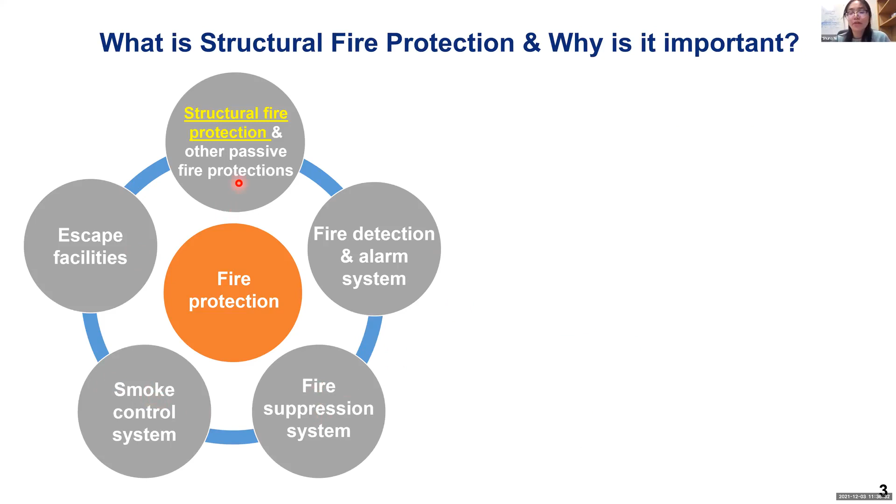So here, for the structure fire protection, it's one of the components of the fire protection of the building. For the fire protection building, it's including different components, for example, the fire detection and alarm system, the fire suppression system, and the smoke control system. The structural fire protection is one component of the fire protection building, and it's mainly to mitigate the risk of structural failure under fire exposures.

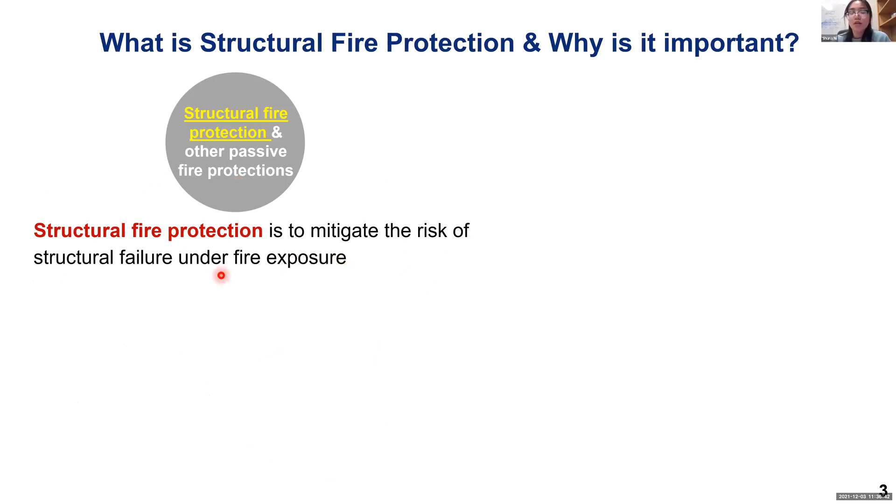So there are two specific objectives for the structural fire protection. The first one is to provide the structural integrity under fire to ensure the life safety of occupants and first responders. The second specific objective is to limit the structural fire damage, to mitigate the social economic losses. For example, if a vehicle fire happens under a bridge, we would like to make sure the structure of the bridge will not be damaged too severely. In this way, we can reduce the transportation disruption time and thus reduce the social economic losses.

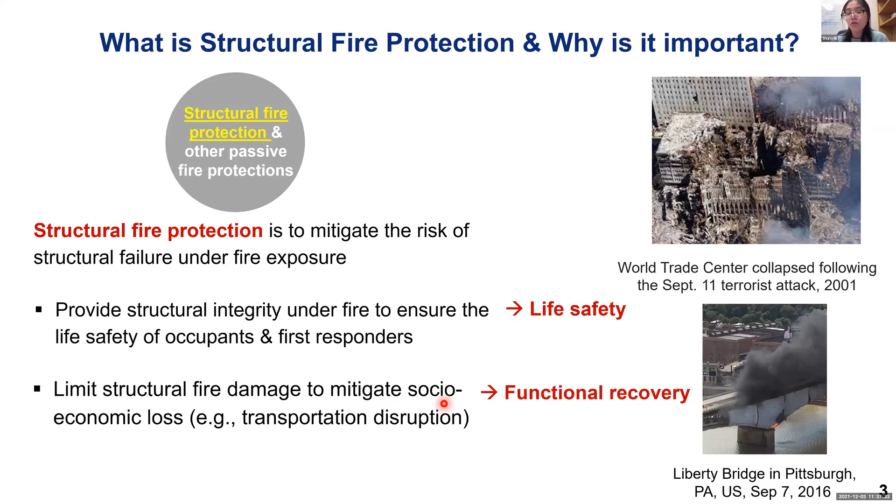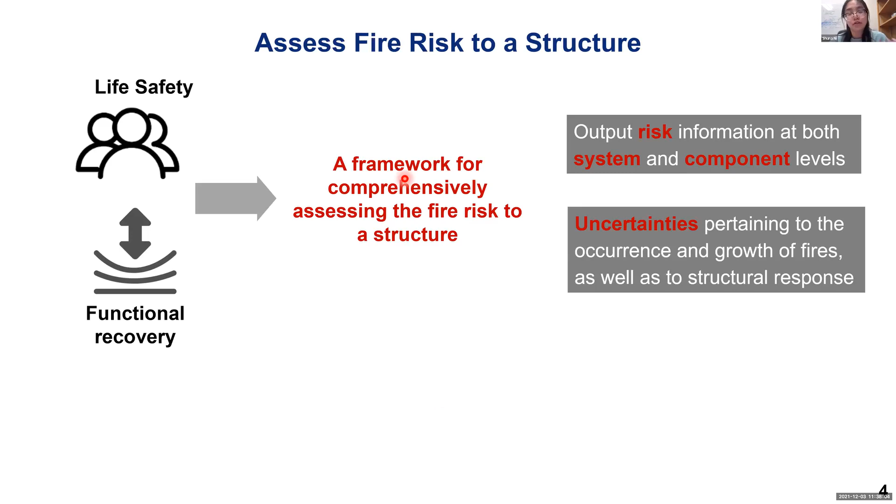So the first specific objective is mainly related to life safety, while the second one is mainly related to function recovery. So no matter life safety or function recovery, it all requires a framework which can comprehensively assess the fire risk to a structure. Here, by comprehensive, we mean that such a framework can output the risk information of a building at both the system level and the component level. We also hope such a type of framework can incorporate the uncertainties related to the occurrence and growth of fire, as well as the structural response. So such a type of framework basically will provide a methodology for the risk-informed performance-based design for the structural fire protection of buildings, and the output of such a framework will also facilitate the analysis of a structure's recovery after fires.

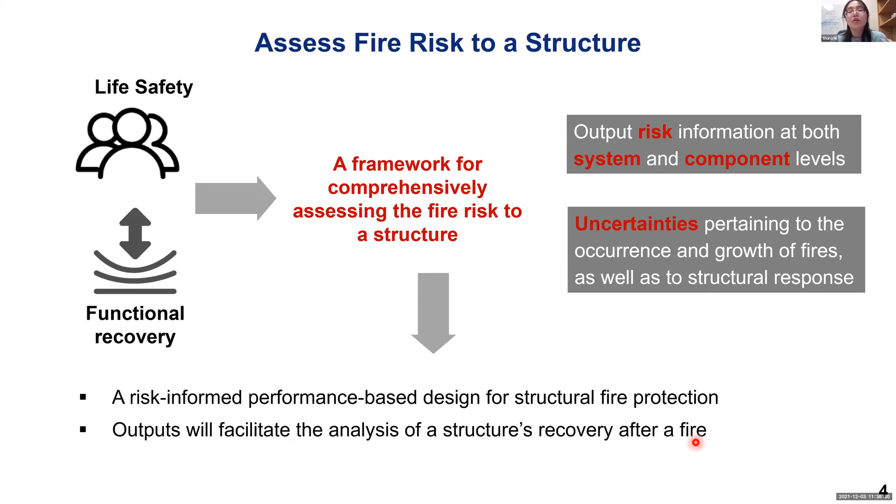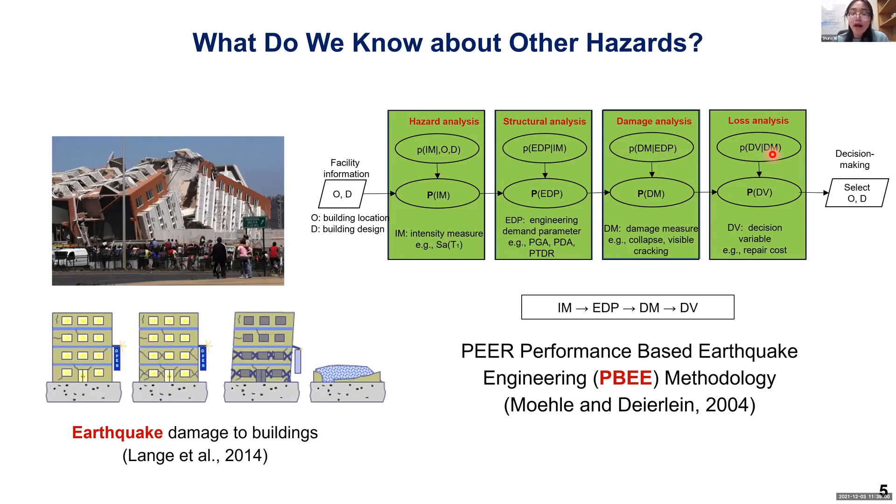So for other types of hazards, for example earthquake, they already have such a type of framework. For example, this is a framework developed by the Pacific Earthquake Engineering Research Center, and this framework basically follows four steps: hazard analysis, structure analysis, damage analysis, and loss analysis. There are some existing research efforts which try to adopt this framework for fire hazards, but there are some remaining challenges which need to be addressed.

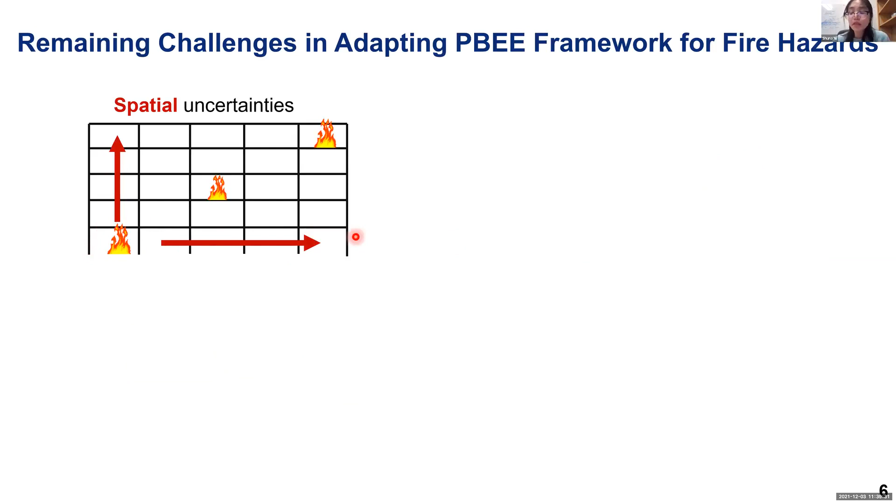So the first challenge is that this framework, those existing frameworks, didn't consider the spatial uncertainties of fire hazards. So when the fire happens, we don't know where the fire will begin, and also we don't know whether the fire will be confined in a compartment or will spread to other areas. Also, those existing frameworks basically use binary failure criteria. Basically, they classify the building as either failure or not failure, collapse or not collapse, which is not true, especially for some reinforced concrete structures.

Reinforced concrete structures usually have relatively good fire resistance. Under fire, these buildings will usually not collapse. But even in non-collapse scenarios, they still require a lot of repair efforts. So we need to propose a more meticulous classification of damage states corresponding to the gradual level of repair efforts for those non-collapse scenarios.

Existing frameworks mainly analyze the structure based on individual structure components—for example, analyzing one column, one beam, or a floor system. But in reality, each component within a building interacts with others. This interaction leads to additional deformation and additional damage. So our framework also needs to capture such interaction between each component within a building.

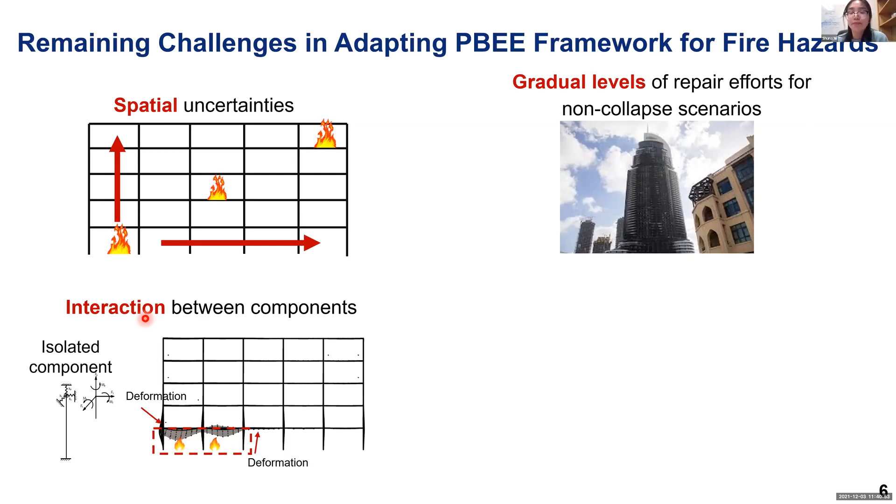The next one is multiphysics—fire damage is multi-physics in nature. Take the reinforced concrete structure for example: there will be damage due to thermal expansion, the expansion of a slab leading to lateral displacement of a column. There will also be section damage due to heat penetration, such as concrete spalling and cracks. We need to address both types of damage in our framework.

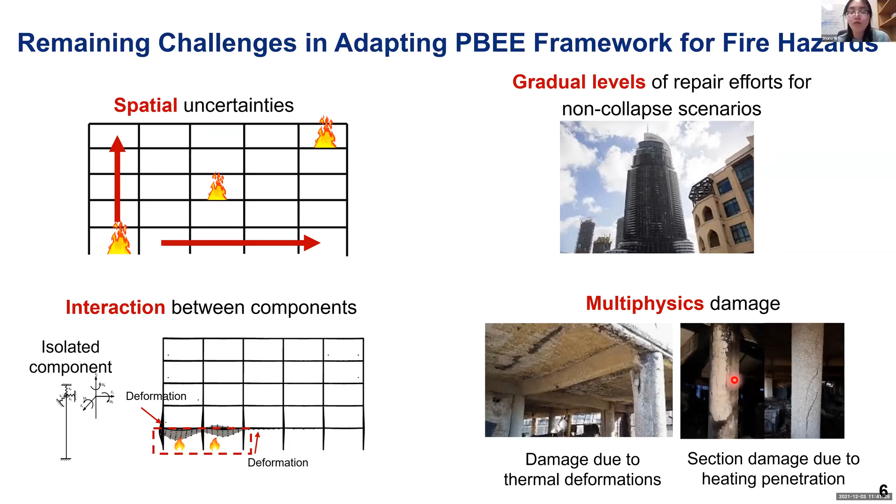This is the framework we have proposed. It's also based on the PBEE methodology, but we consider spatial uncertainty through a loop—basically considering different fire locations and different fire scenarios. For each fire location, our analysis follows four steps: fire hazard analysis, fire-thermo-mechanical analysis, damage analysis, and loss analysis.

In the fire hazard analysis, we identify the probability that a fire happens in one location, and we identify the intensity measure—here, the intensity measure used in our framework is fire load. In the fire-thermo-mechanical analysis, we output the structural response in a fire in a probabilistic manner, incorporating the interaction between each structure component within a building. That's why our framework analyzes a whole structure system rather than an individual structure component.

In the damage analysis, mainly based on the results from the fire-thermo-mechanical analysis, we analyze the probability of building collapse. If the building does not collapse, we calculate the probability of a structure component being at one specific damage state—basically calculating this quantity for each structure component and each damage state.

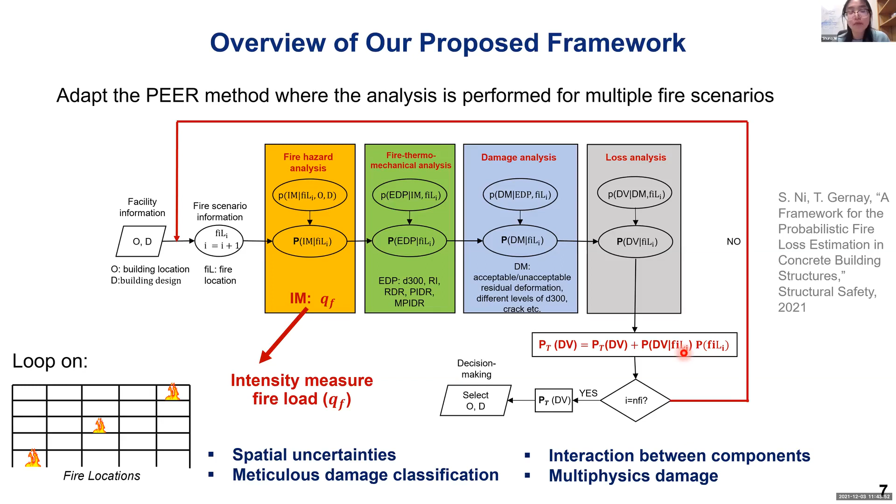So in this first step, the fire hazard analysis tries to identify the probability of fire happening in one location, and we mainly refer to the methods recommended by the Eurocode. Our contribution is mainly focused on the next three steps: fire-thermo-mechanical analysis, damage analysis, and loss analysis.

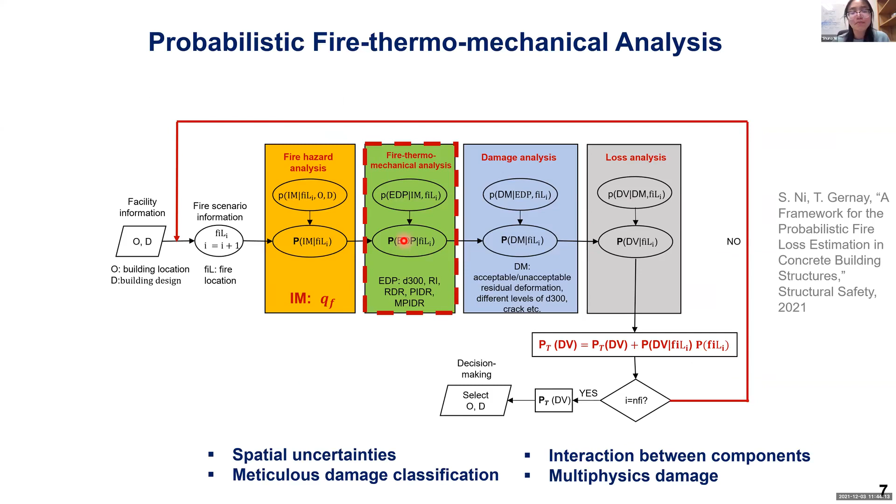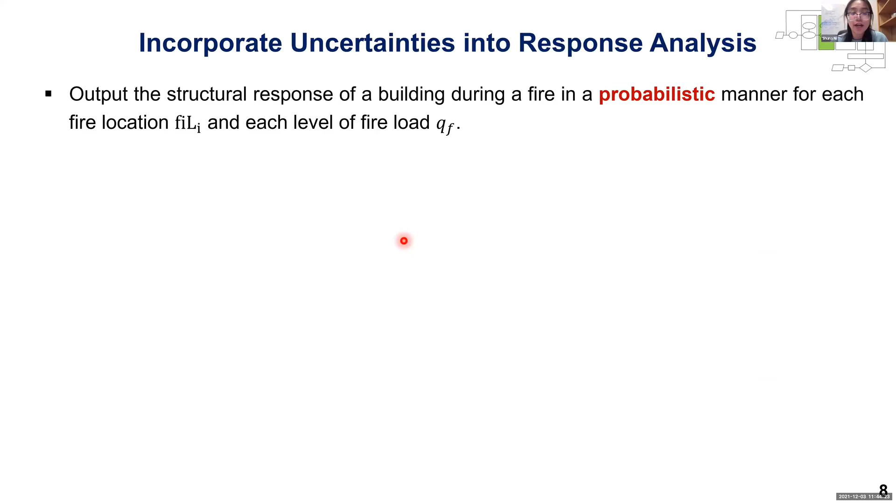Now I would like to give you more insight about the fire-thermo-mechanical analysis. In this step, we try to output the structural response of the building during a fire in a probabilistic manner for each fire location and each level of fire load. In our deterministic fire-thermo-mechanical analysis, the analysis has three steps: fire analysis, thermal analysis, and mechanical analysis.

In the fire analysis, we analyze how the fire develops in our building, and that information is input into the thermal model as the thermal boundary condition to analyze the temperature distribution in a structure component or building. That temperature data is input to the mechanical model as the thermal load to analyze the structure's response in the fire. This is the deterministic manner, but in reality, uncertainty exists everywhere.

The opening or compartment have uncertainties. Mechanical load has uncertainties. Material properties also have uncertainty. There are a lot of other variables with uncertainty. So in this step, we need to incorporate all these different types of uncertainty into the fire-thermo-mechanical analysis through Monte Carlo analysis or other methods. Ultimately, we would like to output the probabilistic distribution of the building response rather than individual values.

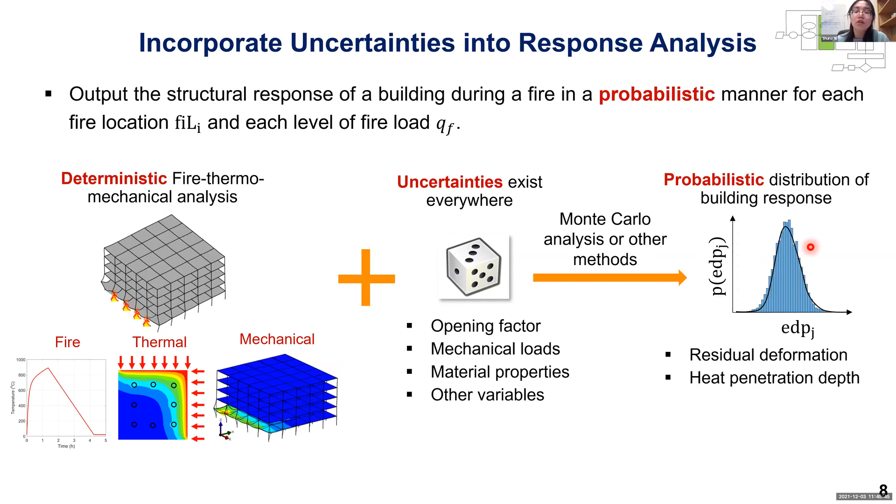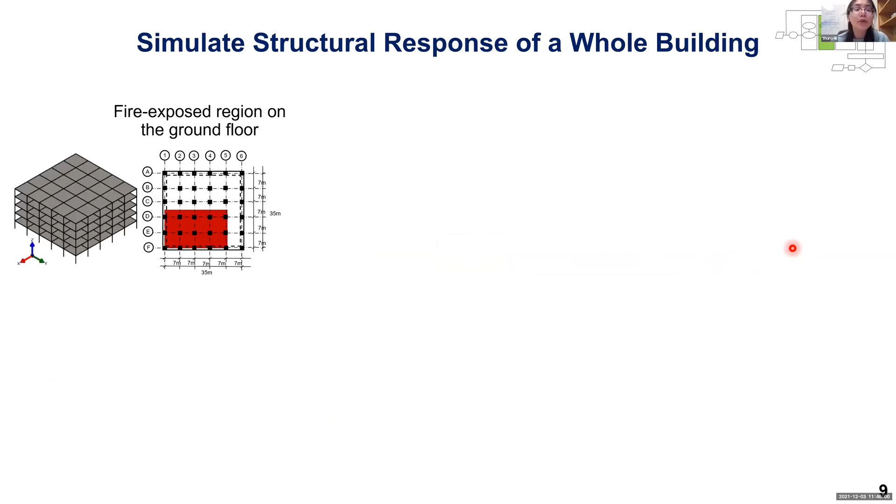As mentioned, our analysis is based on the building system. I would like to show you why we need to analyze the whole building system. This is a 5-story building, and we analyze the structural response. We developed the building model for the whole building, and we analyze the displacement of each structural component under the fire.

If you look at this column, due to the thermal expansion of this slab, this column has a very large lateral displacement. The maximum value is up to 116 millimeters. Even when the temperature cools down to ambient temperature, the remaining lateral displacement is still 79 millimeters. This type of deformation cannot be captured if you're using isolated structure component analysis. If you just analyze this column alone, this type of deformation is very difficult to capture.

However, there's a problem. Since our analysis is probabilistic in nature, if we analyze the whole building system and run the scenario 1,000 times, that will be very time consuming.

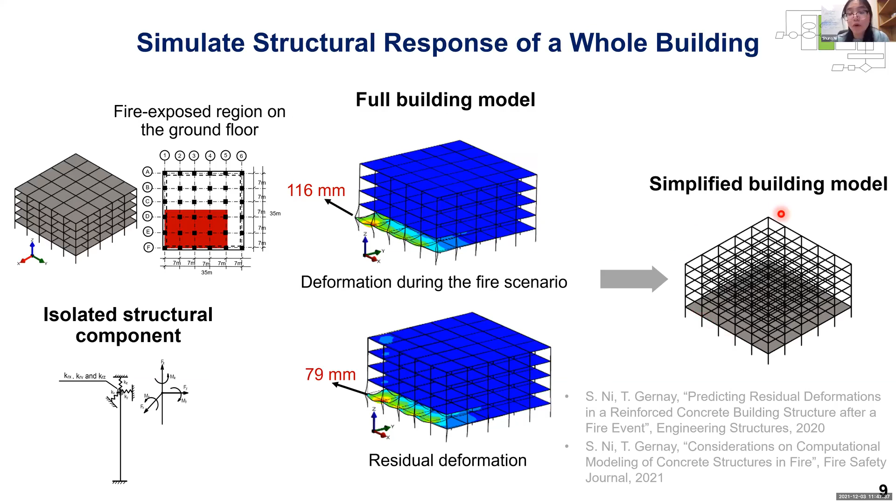It will require a lot of computation time. So what we've done is try to simplify the model. Our research has shown that if your fire is just at the first story, you don't need to model the other floor systems. You just need to model the floor system above the region where the fire begins. This is a simplified building model, and here's some comparison between results from the two models.

This is the result of the lateral displacement at the top of the first story column. We've analyzed the lateral displacement at this location, at the top of the first story column. The left side is the maximum displacement, and the right side is the residual displacement. We compared the results from the two models, and they are very close to each other, both in magnitude and direction.

Such a simplification has reduced the computation time by half, but it's not enough. So our next step is to develop some data-driven surrogate models to replace those physical models, but this is one of our future research directions. Basically, we would like to develop a data-driven surrogate model to analyze the structural response of a whole building system under fire.

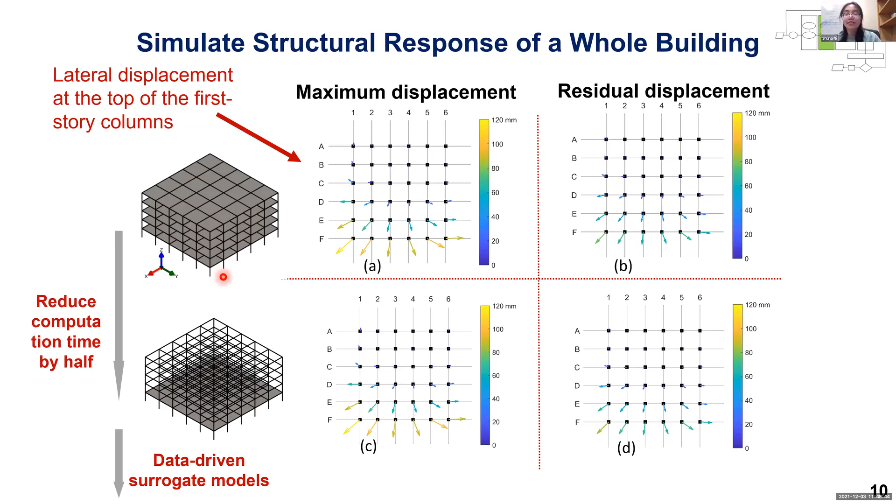As we've mentioned, we would like to consider the uncertainties. So how do we consider uncertainty? We need to have a lot of probabilistic models for different variables. Previous research has developed probabilistic models for openings and for mechanical loads. Our contribution is the development of the probabilistic temperature-dependent concrete model.

So we collected this concrete strength data from different literature and previous studies, and here are those concrete strengths. The model we developed is the retention factor. The retention factor is the ratio of the concrete strength at high temperature, at one specific temperature, over the concrete strength at ambient temperature.

We developed the probabilistic model for the concrete data at each temperature, and ultimately the parameters for the Weibull distribution were fit as a function of temperature. This is how we developed these probabilistic models. The probabilistic distribution we used is the Weibull distribution. We tried comparing results from different distributions and found the Weibull distribution works best.

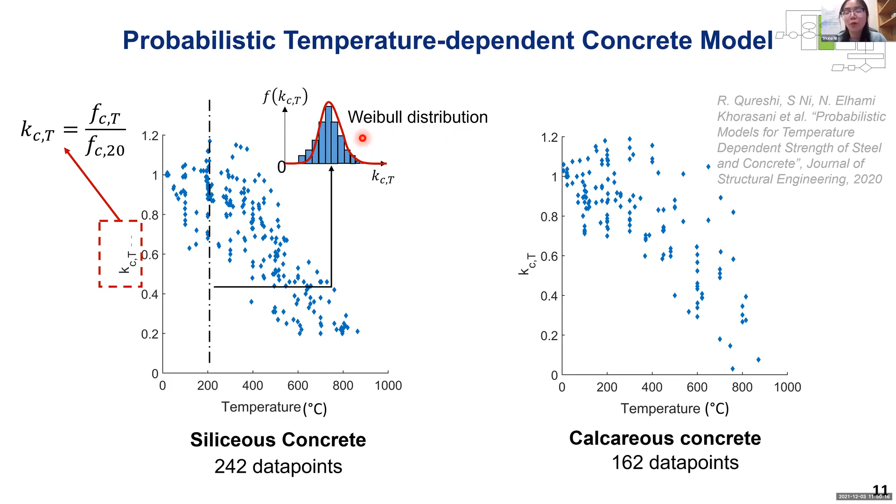This is a comparison of our probabilistic model with some deterministic models. The black solid line is the median value of our model, and it's very close to the deterministic model in red. We also found that most test data fall between the 5% quantile and the 95% quantile of our model. This is the temperature-dependent concrete model.

We also developed the model for steel, for the temperature-dependent yielding strength of the steel. Those probabilistic models have been incorporated into commercial nonlinear finite element software, which is mainly used for structural engineering.

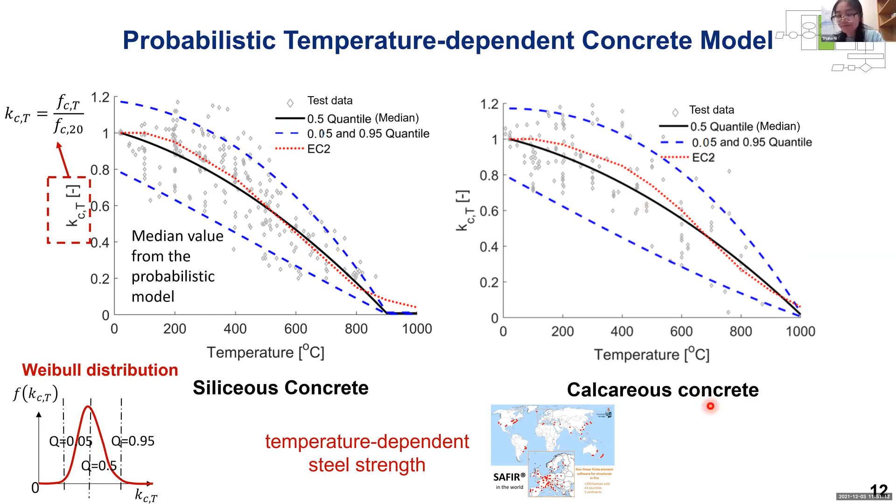So now I've been talking about the fire-thermo-mechanical analysis. Basically, this step can output the response of the structure in a probabilistic manner. Based on these results, we can do the damage analysis. Here I would like to show you what damage we consider in this framework.

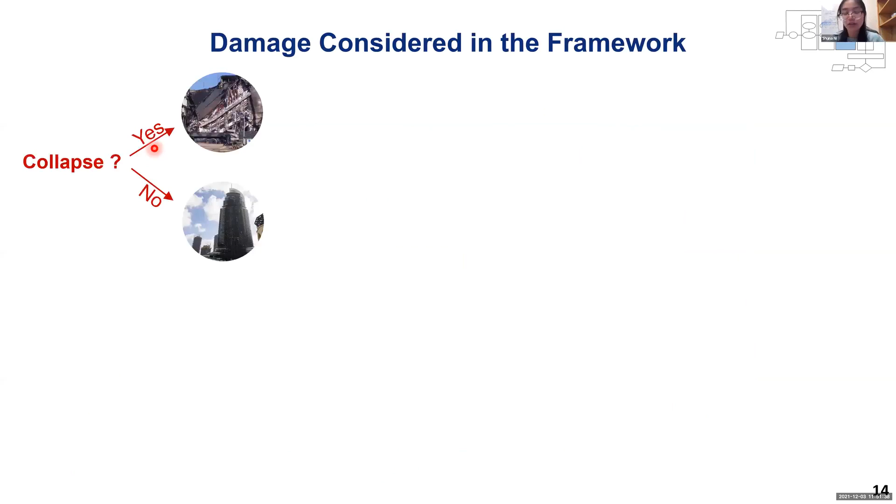We first need to identify whether the building will collapse or not. If the building does not collapse, we need to consider the damage in the fire rated and non-fire rated areas, and we need to consider damage to structural components, non-structural components, and content.

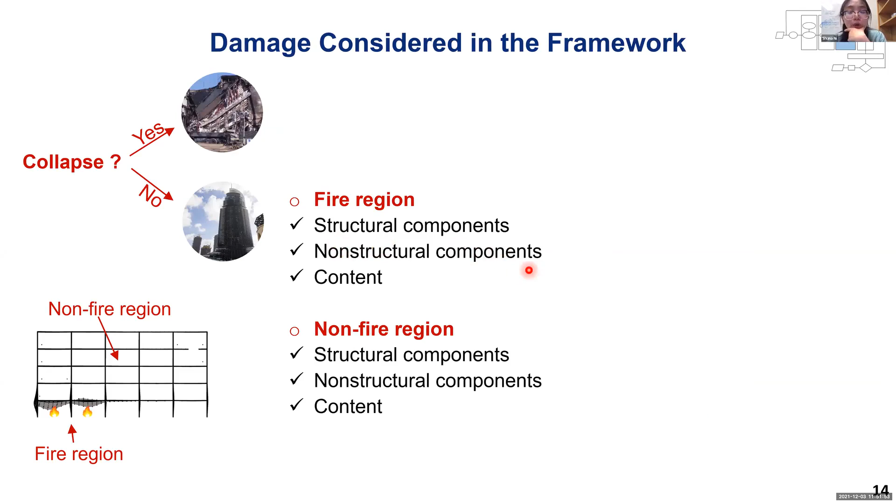So the output of this step is, first, the probability of building collapse under the fire load QF, conditioned on the occurrence of fire in location I. And if the building does not collapse, this step will tell you the probability of a component being at a specific damage state under the fire load QF, conditioned on the occurrence of fire in location I.

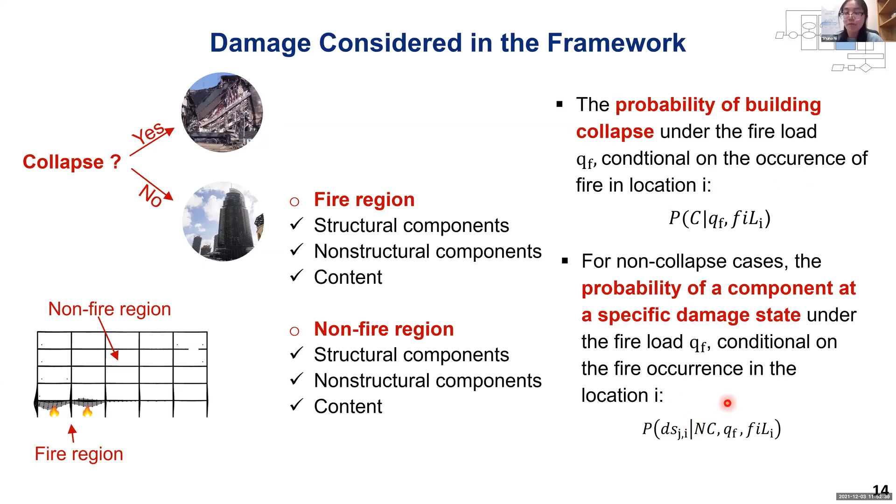It's very easy to calculate the probability of building collapse, but the calculation of the probability of a component at a specific damage state requires a lot of definition and further development of this framework. So next, I would like to show you how we calculate the probability of a structure component at one damage state.

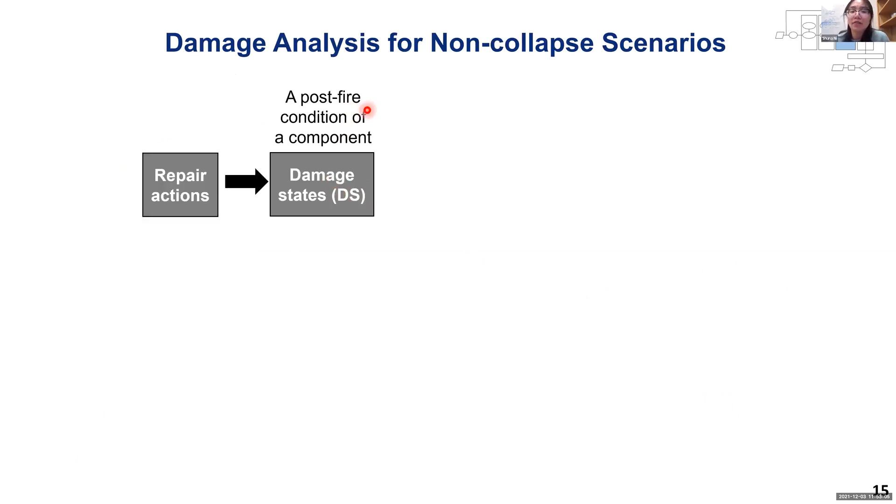First, we need to define the damage state of a structure component after the fire. The damage state means the post-fire condition of a component, mainly determined by the different level of repair actions. The engineering demand parameter, which is a response quantity for estimating damage, is used to estimate the damage. Where do we get the engineering demand parameter? It's the response quantity of the building.

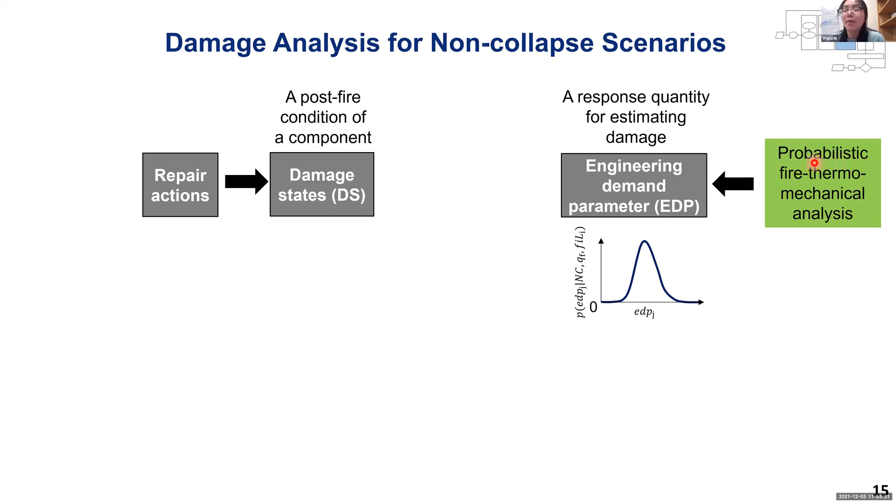Definitely, it comes from the second step, probabilistic fire-thermo-mechanical analysis. This step outputs the probabilistic distribution of those response quantities. These two, damage state and engineering demand parameter, are connected by the fragility function. The fragility function is the probability distribution of reaching or exceeding a damage state.

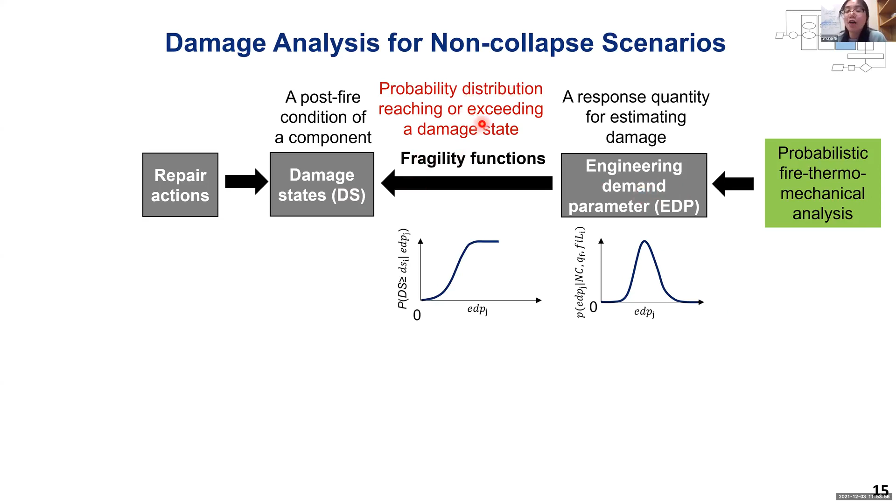Ultimately, the convolution of the fragility function with the probability distribution of the engineering demand parameter will tell you the probability of a structure component reaching or exceeding one damage state. But it's conditioned on fire load qf, and the fire happens at location FILI.

So this calculation process will be repeated for different fire loads. Ultimately, we get the fragility function as a function of fire load. So the damage state of a structure component is now at one specific damage state.

The damage probability distribution of a structure component at one specific damage state will be the difference between two successive damage states. Since the earlier calculation was just reaching or exceeding, this part of the calculation will ultimately tell you the probability of a structure component at one specific damage state. So this is how we calculate the probability of a structure component at one specific damage state.

From this, we may already know that we need to define the damage state. We also need to know the fragility function, and we also need to propose the engineering demand parameter. All those functions or parameters need to be hazard specific. For fire hazard, it has to be fire specific. But all of this is trying to address the damage state.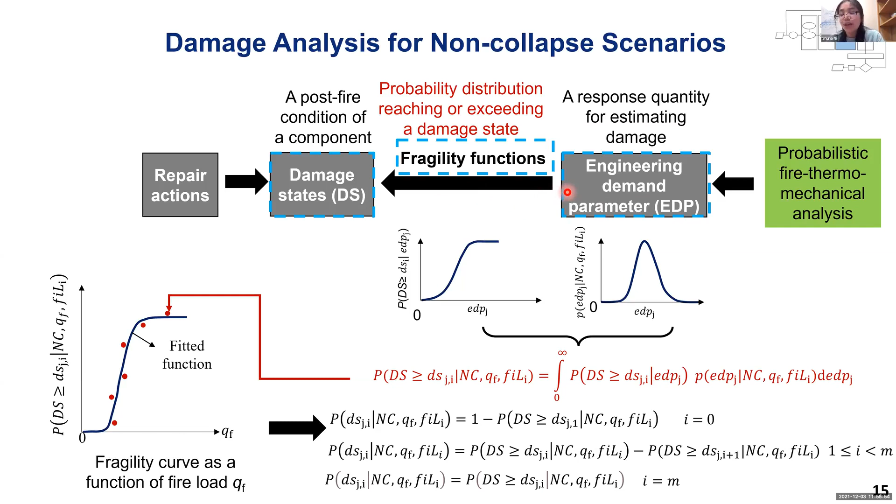The characteristic of fire hazard, as we mentioned, is multiple physics. It will have some section damage due to heat penetration, spalling, cracking, and also some damage related to thermal expansion, the residual deformation. Both types of fire damage need to be addressed by this framework.

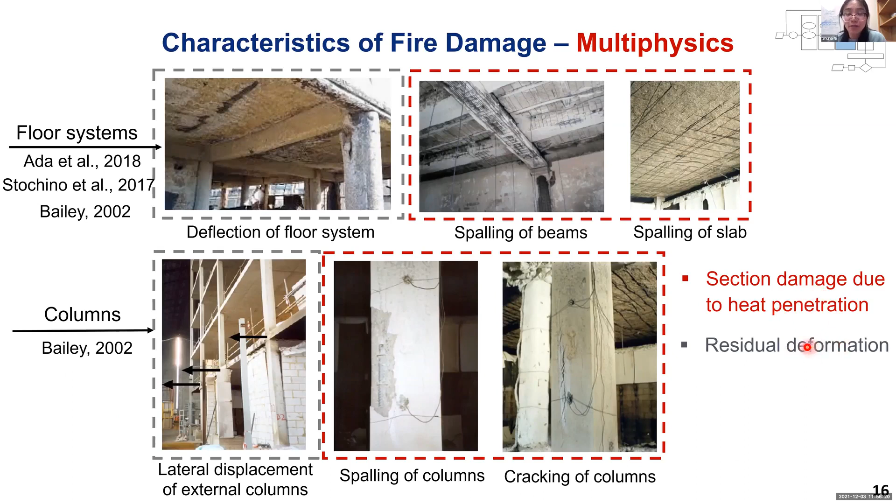Corresponding to the two types of damage, we have defined two sets of engineer demand parameters. One engineer demand parameter tries to address the section damage due to heat penetration, while the other set of engineer demand parameter tries to address the residual deformations.

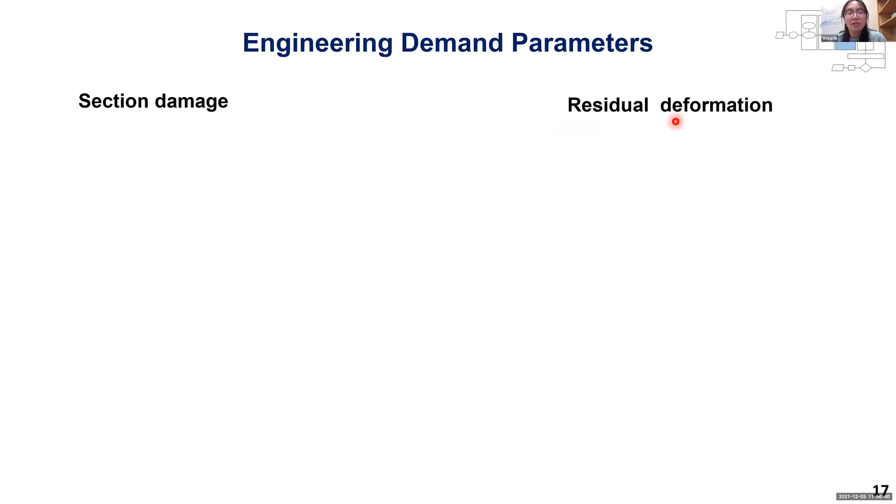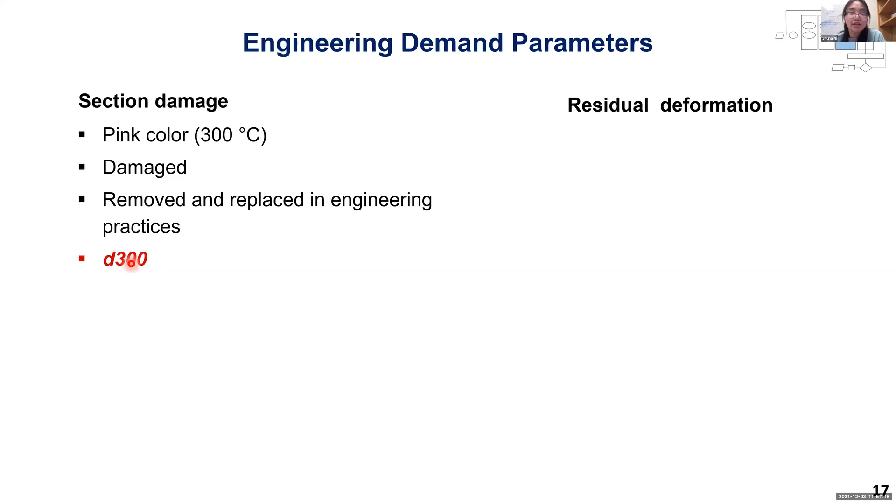For the section damage, usually with heat penetration in practice, when the temperature of the concrete exceeds 300 Celsius degrees, the color of the concrete will turn to pink, and in practice that concrete will be replaced. So the engineering demand parameter we defined to address the section damage due to heat penetration is D300. D300 is the heat penetration depth of the isotherm with peak history temperature equal to 300 Celsius degrees.

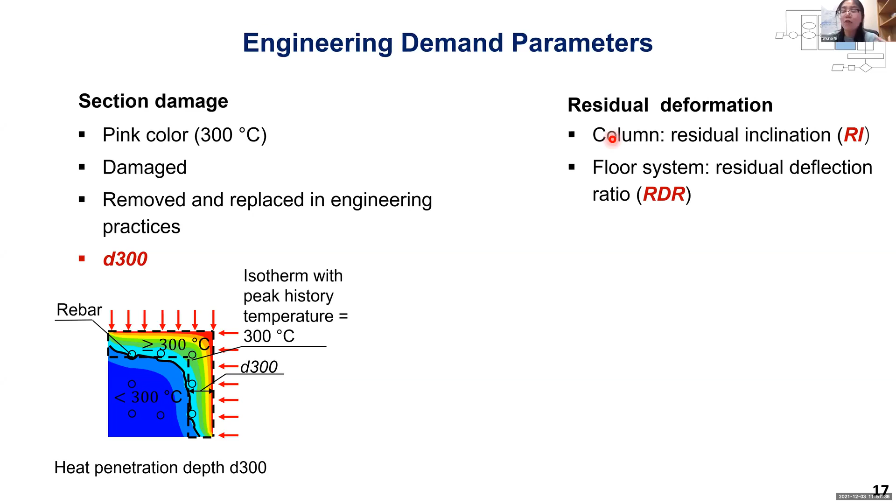For the residual deformation, we have proposed different engineer demand parameters for different structure components. For the column, what we have defined is residual inclination, which is the lateral displacement at the top of the column over the height of this column. For the floor system, what we have defined is the residual deflection ratio, which is the deflection of a floor system over the span of this floor system.

So this engineering parameter tries to address the section damage due to heat penetration, while this set of engineering demand parameter tries to address the residual deformation of a structure component after the fire hazard.

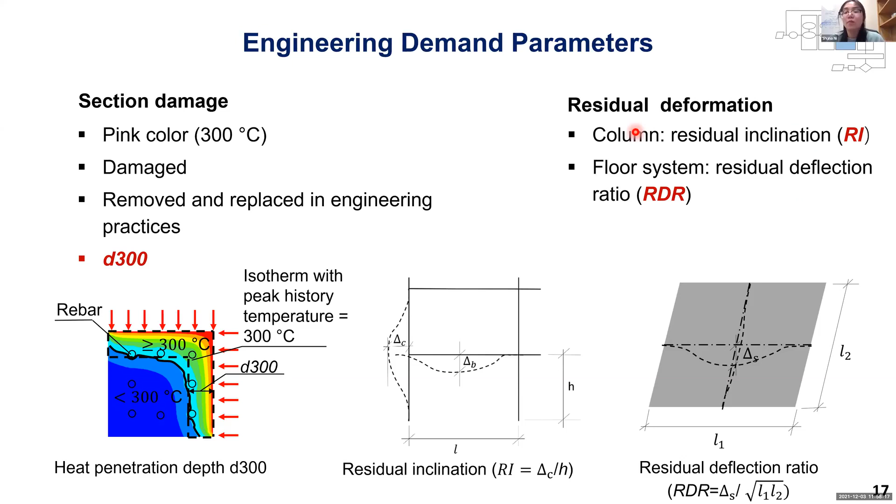Now I would like to show you how we define and propose the classification of damage states. Let's take the heat penetration damage, for example. Basically, in the development of the classification of damage states, we need to make sure each damage state corresponds to each level of repair efforts.

For heat penetration damage, in practice the level of repair efforts is mainly determined by the heat penetration depth of the isotherm, which is equal to the peak temperature equal to 300 Celsius degrees. This parameter is the engineering parameter we have defined to judge the section damage, meaning this d300 determines the repair efforts, while the repair efforts determine the damage states.

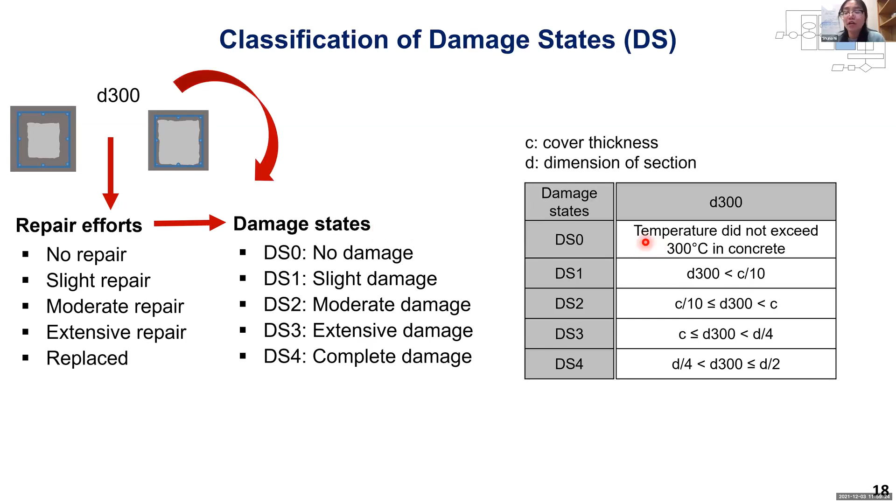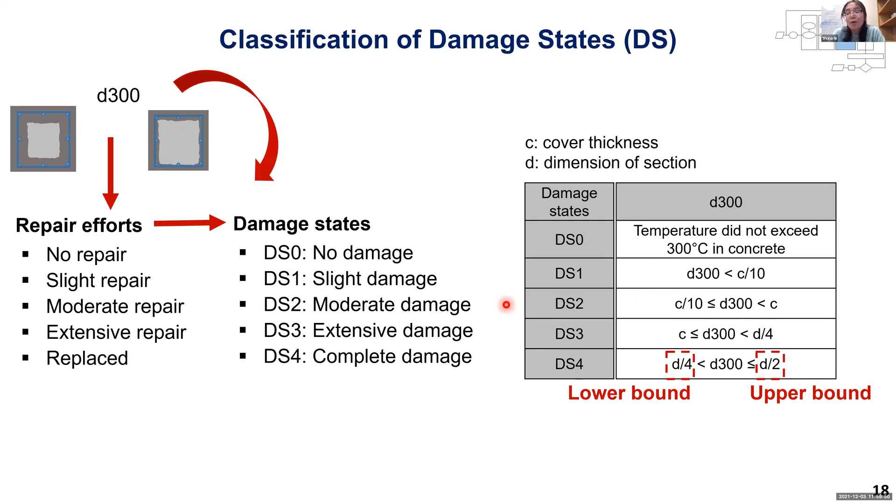That's why when we define each damage state, we can use a range of the engineering parameters. For each damage state, we propose a range of the engineering demand parameter with an upper bound and a lower bound. This is how we classify the damage states, mainly based on the engineering demand parameter, with a lower bound and upper bound for each state. Next step is the fragility function.

The fragility function for earthquake engineering is mainly developed based on test data. But the structural response under fire has relatively limited test data, so we use a different way to develop the fragility function.

As mentioned, our classification of damage states is mainly based on the engineering demand parameter directly, a range of which defines one damage state. So once we get the probability distribution of the engineering demand parameters, we can calculate the probability of a structural component being at one specific damage state directly. But in reality, uncertainties exist everywhere.

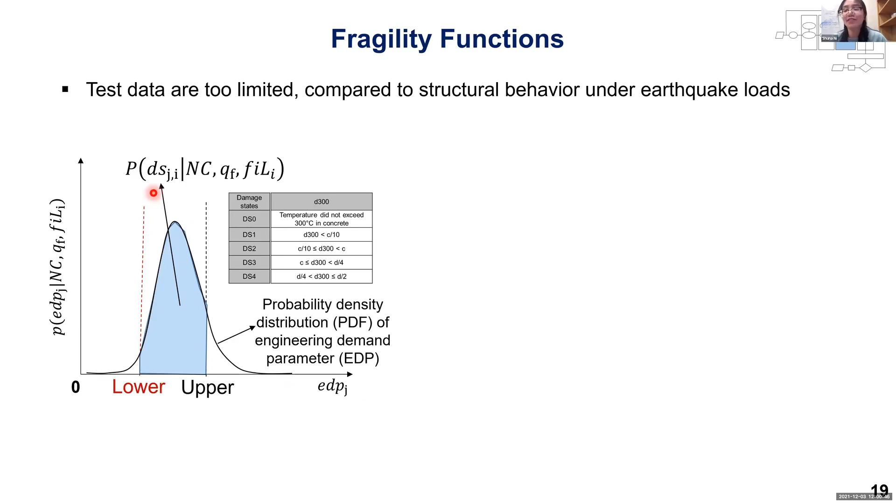So those lower bound or upper bound values also have some uncertainties. For example, different engineers may have different opinions about those threshold values. So we assume those threshold values follow a log normal distribution. Ultimately, the log normal distribution of the lower threshold value becomes a fragility function for one damage state.

Once we get the probability distribution of the engineering demand parameter, the convolution of the fragility function and that probability distribution ultimately tells us the probability of a structure component reaching or exceeding one damage state.

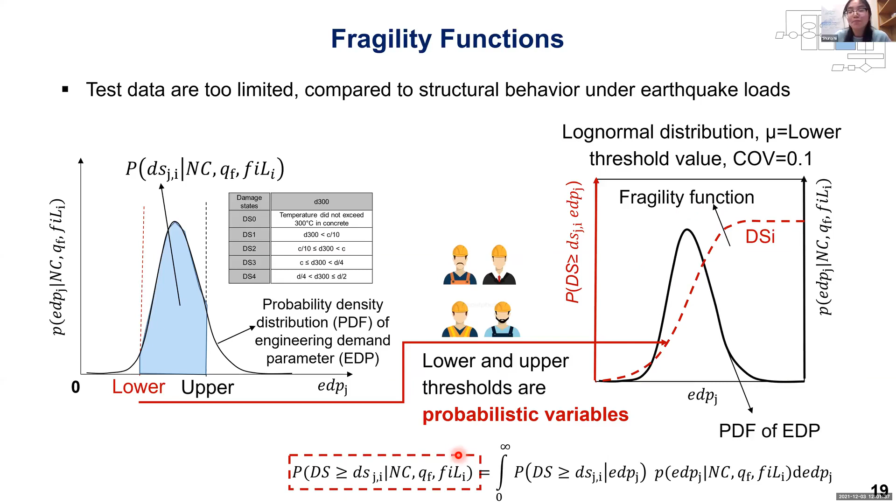So this is how we have defined the fire-specific engineering demand parameters, the fire-specific classification of damage states, and also proposed fire-specific fragility functions, and how we develop those fragility functions for fire-specific damages.

Based on those definitions of parameters and functions, we can conduct the damage analysis and get the probability of a building collapse. If the building does not collapse, we can calculate the probability of a structure component being at one specific damage state, and those probabilities allow us to do the loss analysis.

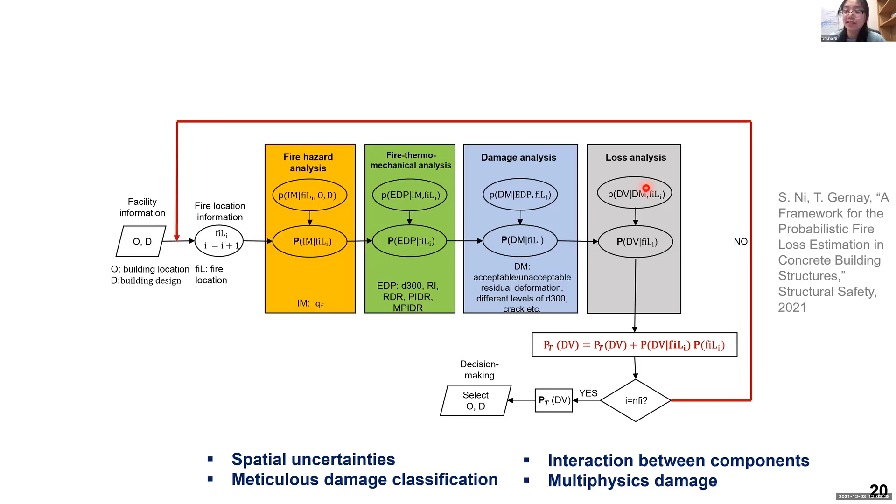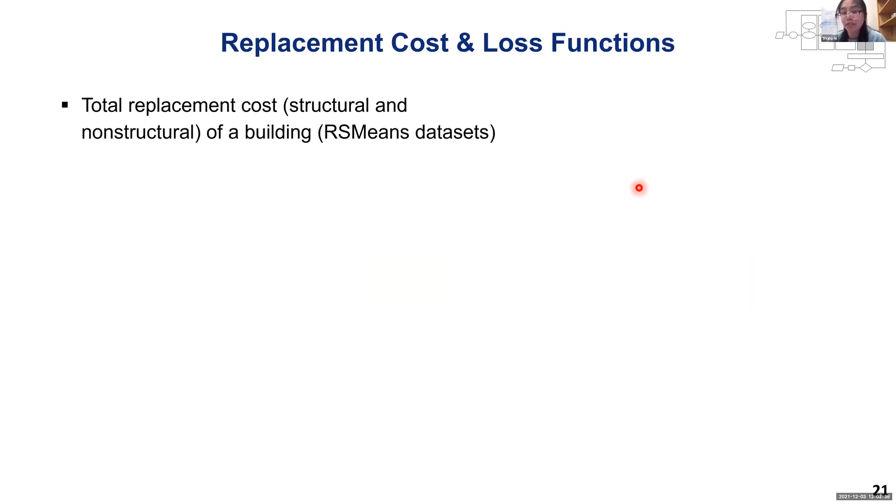In the loss analysis, first we need to identify the total replacement cost of a building. If the building collapses, the cost will be the total replacement cost, including the cost for the structure component and the non-structure component, and also the content in the building, along with the total replacement cost for structure and non-structure components.

Those costs can be estimated using construction manual data. For example, in the United States, the RSMeans dataset has been used very frequently by people in the industry. For the content replacement cost, FEMA's recommendation is that the replacement cost for the content in a building is equal to the total replacement cost of the structure and non-structure components of the building.

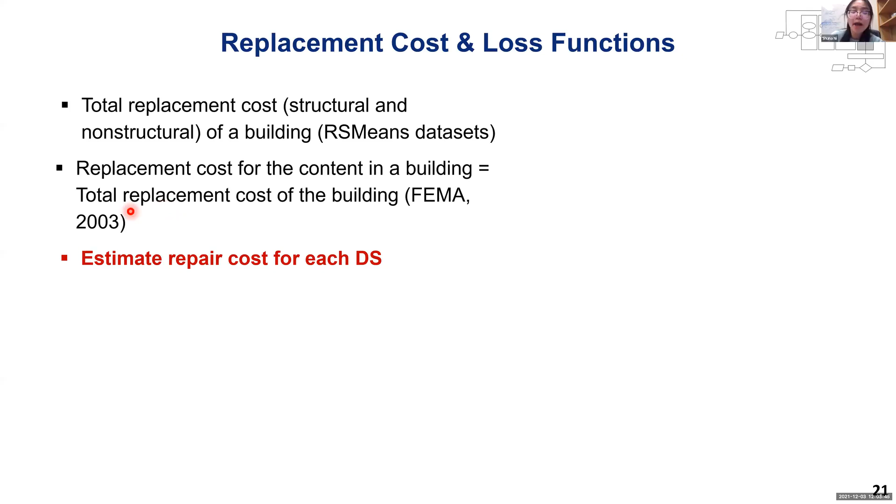If the building does not collapse, we need to identify the repair cost for each damage state for each structure component. The repair cost really depends on the repair action used. We have identified the different repair actions from the literature and by talking with people in the industrial field, for each damage state and each structure component, and based on this we can calculate the mean repair cost for each structure component at each damage state.

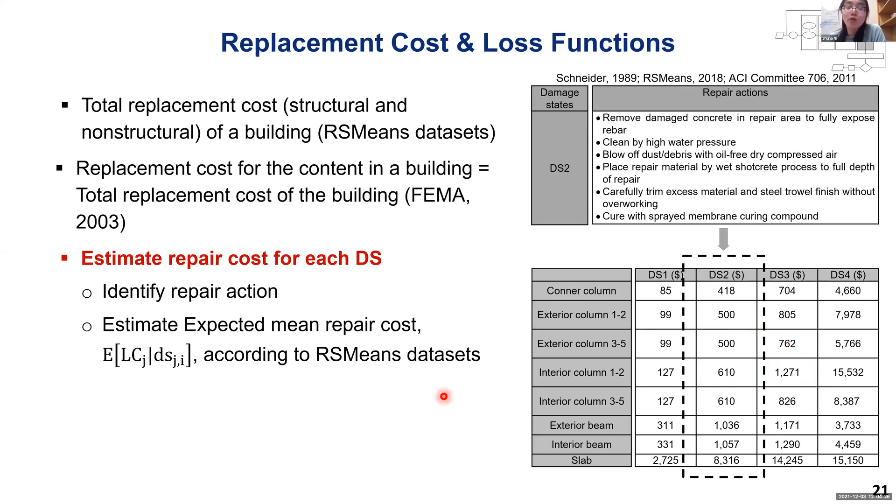Some literature has also recommended that these repair costs follow a log normal distribution with a relatively high coefficient of variation, ranging from 0.6 to 1.1. These are the loss functions.

Now we know the replacement cost of a building and the replacement cost for the content, and we have the loss function for each structure component at each damage state. Now we can do the loss analysis.

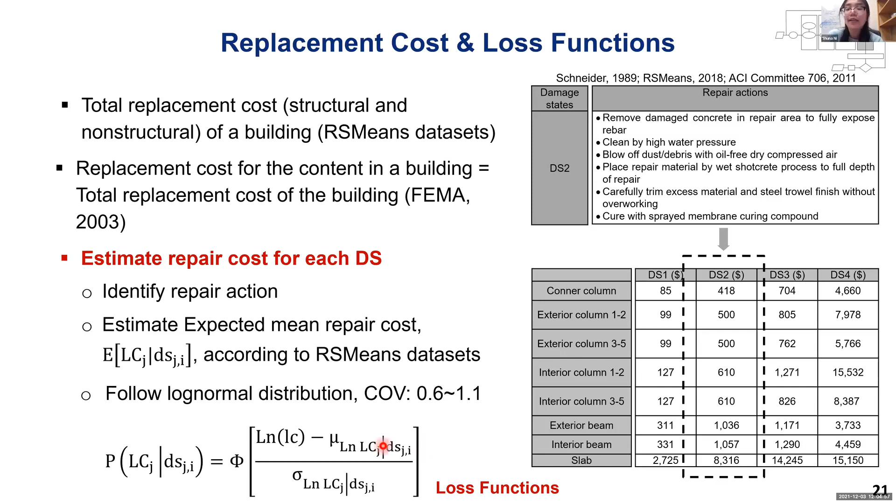As an example, I would like to show you how we have calculated the expected loss for a building. In this calculation, we need to consider the probability of building collapse, and also the probability of components at different damage states.

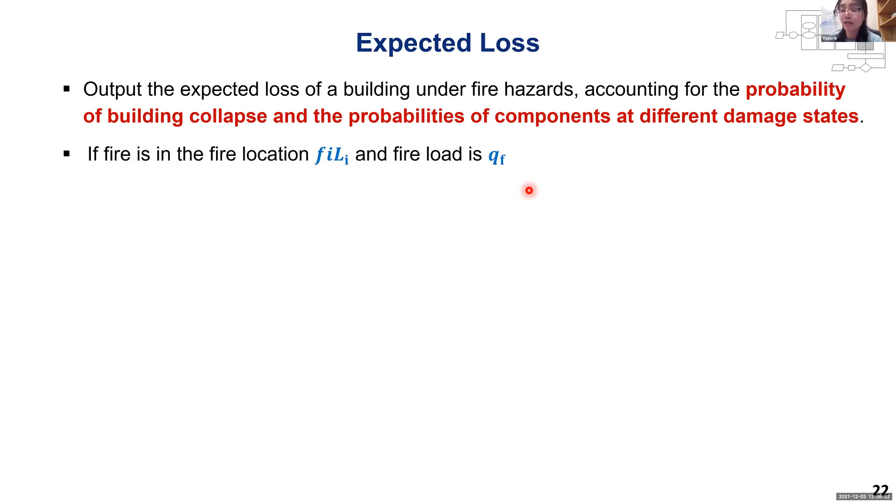If the fire is at fire location FIL with fire load QF, the expected loss of the building in such a scenario is a weighted summation of the expected loss for the collapse scenario and the non-collapse scenario. For the non-collapse scenario, we need to consider the repair cost in the fire region and non-fire regions. This needs to be repeated for different levels of fire load.

Ultimately, we get the expected loss as a function of the fire load. This function will be convoluted with the probability distribution of the fire load, and this can tell us the expected loss of the building when the fire happens at location FILI.

This needs to be repeated again for different fire locations. So the total expected loss of the building will be the weighted summation of the loss for different fire locations, where the weight is the probability that a fire happens in that specific location. This is how we calculate the expected losses.

The information output provided by the previous steps can help you do more analysis, and more interesting results can be shown that can help support the decision making.

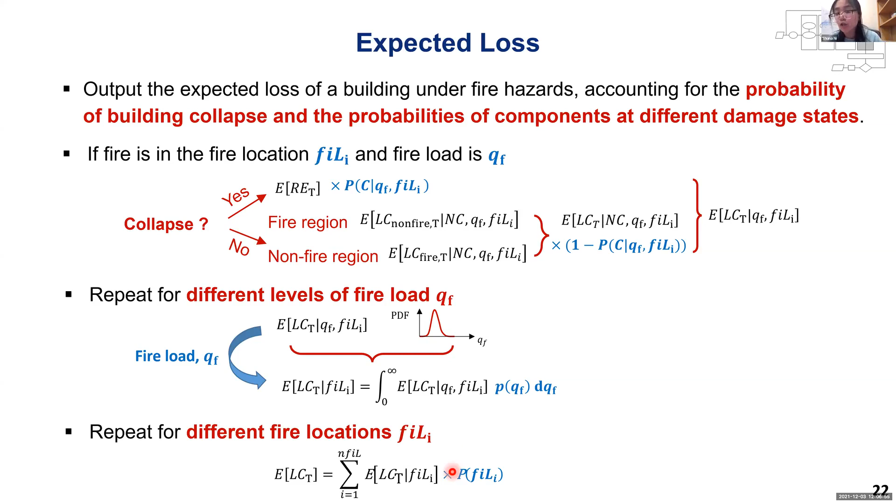I have already introduced the overall structure of the framework we have proposed and what we have done to make this framework work for fire hazards. Now I would like to show you several case studies.

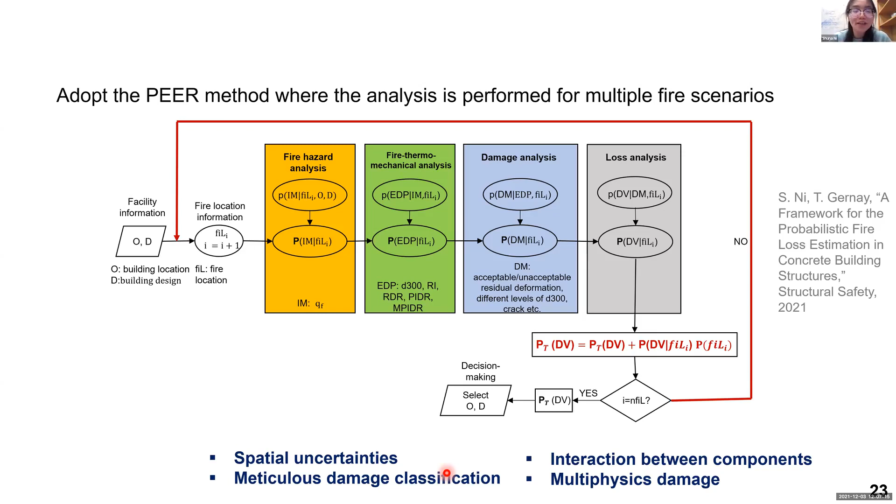This case study is a 5-story reinforced concrete building, an office building designed according to the Canada code. According to the IBC, International Building Code, it's type 2A, and the fire resistance is 1 hour.

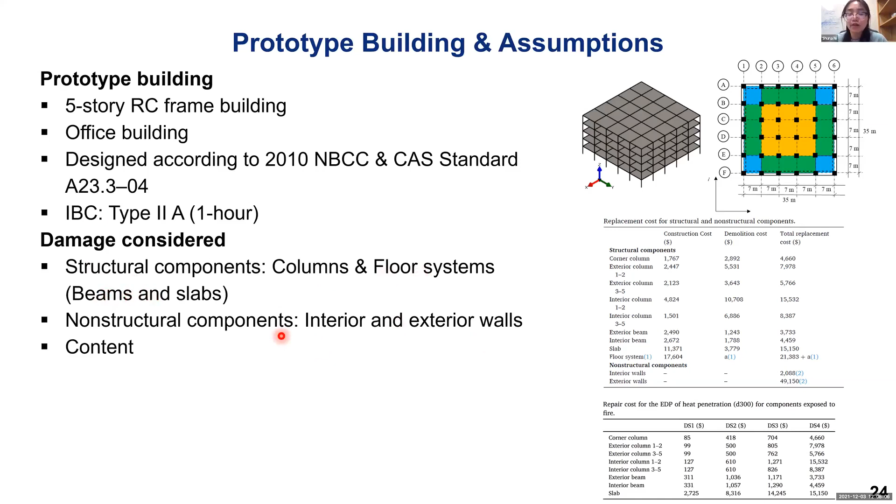These are the damages we considered in this framework: structure damage, fire damage to structure components, fire damage to non-structure components, and fire damage to content. For structure components, we mainly focus on columns and floor systems, with floor systems including two parts: beam and slab. For non-structure components, we mainly focus on interior walls and exterior walls.

Here's some cost data, which is provided either by referring to FEMA recommendations or estimated according to the RSMeans dataset.

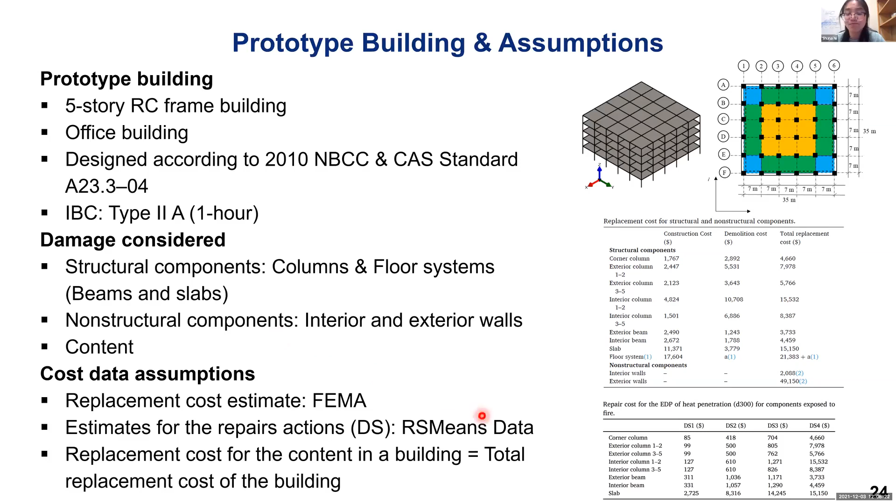Here's case one. We assume all fires happen in a 7 meter by 7 meter compartment, but we consider different locations from the first story to the top story. We assume the fire is confined to one location, 7 meters by 7 meters, but consider different locations as the fire moves through each compartment.

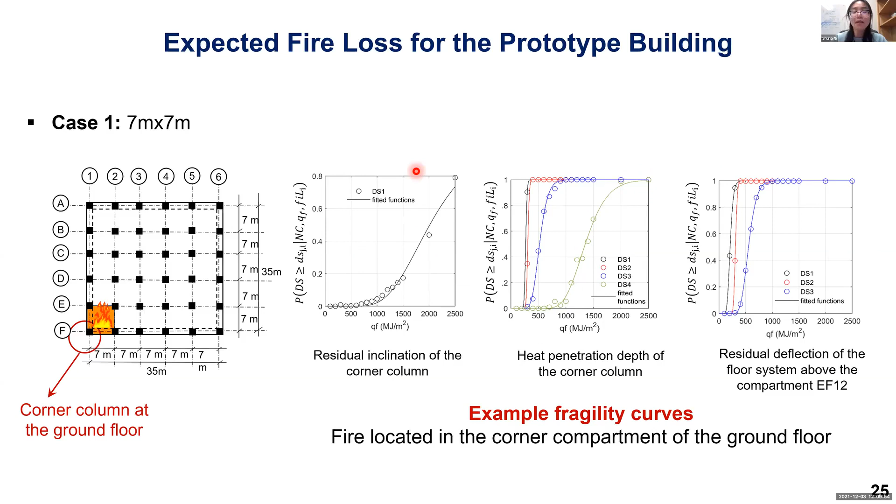We need to get this type of information for each structure component in a building and for each fire location. Ultimately, we are able to calculate the expected loss of this building, and the loss will be...

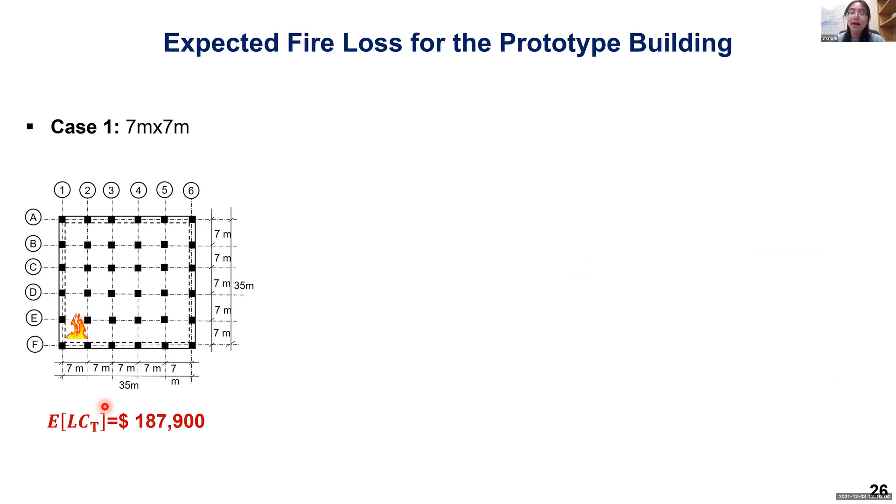187,900. Analyzing the contribution of each component—content, non-structure component, and structure part—we found that most of the fire loss comes from fire damage to the content and non-structure components, while the damage loss due to structure components only accounts for 14%. This is a relatively low ratio.

Here's the explanation for why it's low: in our framework, we only consider the direct fire loss, not the indirect fire loss. But when a building is damaged by fire, if the structure system is damaged, it usually requires more repair time and repair effort.

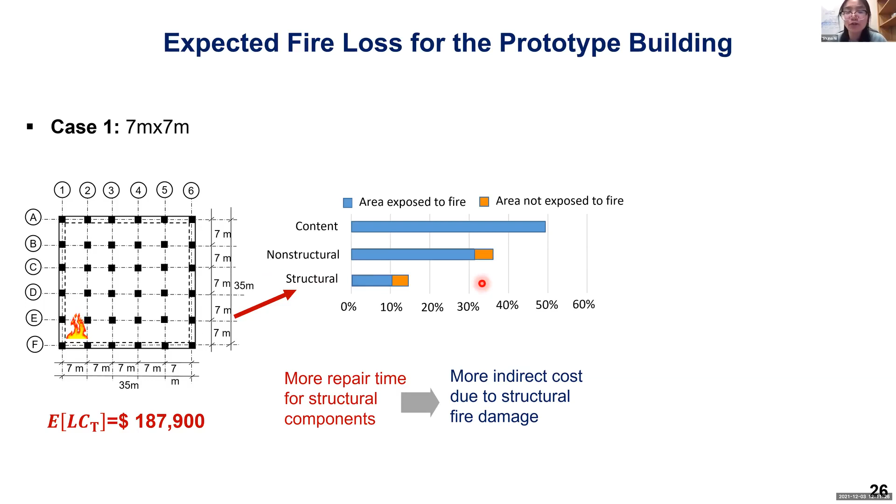If we consider those repair time, repair efforts, and definitely the indirect loss due to the damage to the structure system will be increased significantly. So the ratio, if you consider the indirect loss due to the fire damage to structure system, will definitely increase dramatically. This is also one future research direction for our project.

And also we have considered another case. In case 2, we assume all the fire is confined in a 21 meter by 21 meter compartment, also considering different fire locations. And we found that the fire damage loss increased dramatically.

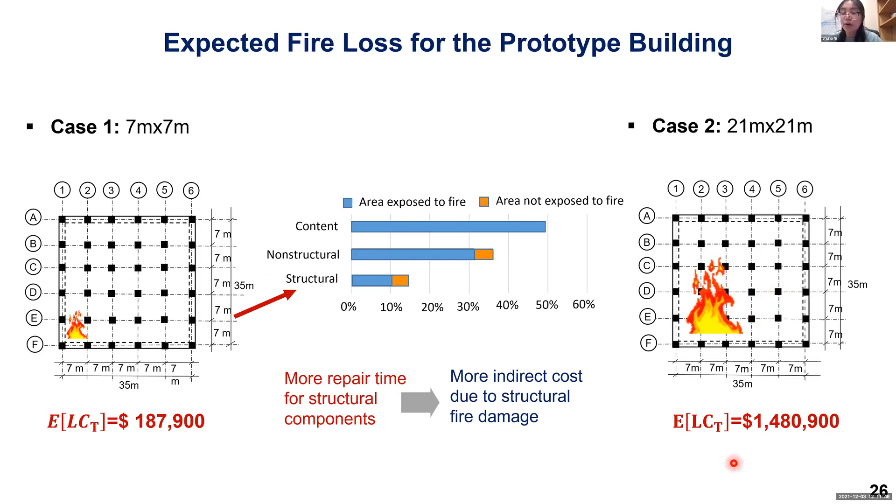The last scenario is case 3. We assume the fire starts in a 7 meter by 7 meter compartment, but have a probability of 5% to spread to an area of 21 meter by 21 meters. We used event trees to analyze the probability of each fire scenario and calculated the fire loss. We found that compared to case 1, case 3's fire loss has increased by 28%.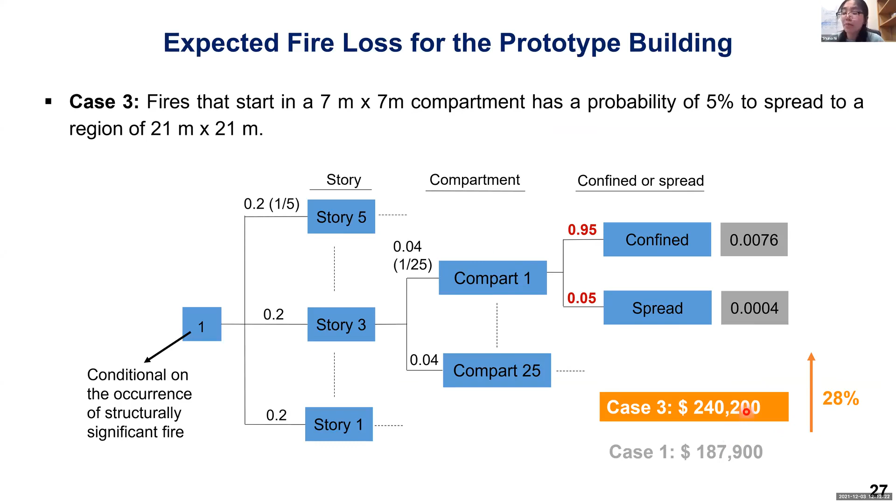So here's our conclusion. The first one is both life safety and functional recovery require a comprehensive framework for estimating the fire risk to a building structure. This type of framework, for one thing, provides a methodology for the risk-informed performance-based design of the building structure fire protection.

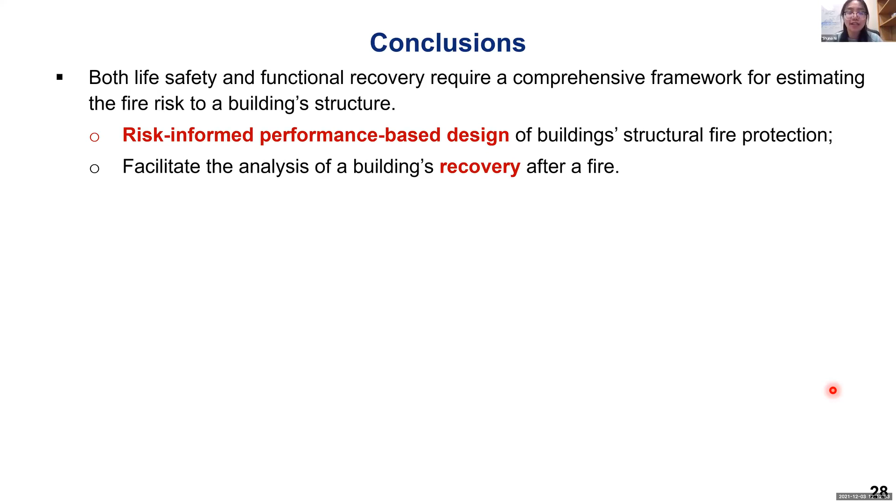And also the output from this framework will facilitate the analysis of building recovery after fires. In our research, we have adapted the PEER methodology for fires, but we define and consider some specific characteristics in our framework. First, we consider the interaction between each structural component within a building.

Then we also developed probabilistic material models for high temperature, for concrete and also for steel. We have defined a fire-specific dual set of engineering demand parameters to capture the multi-physics nature of the fire damage. The last one is we define the fire-specific fragility function and loss function based on literature data for post-fire repairs, and I have shown you the 3 case studies.

The case studies have shown that the direct fire loss due to structural damage is limited. But one point needed to keep in mind is that this framework only considers the direct fire loss. If we consider the indirect loss due to fire damage to the structural component, the fire loss due to fire damage to structure system will increase dramatically.

The case studies have also shown that, if we just consider the direct fire loss, it mainly comes from the content and the non-structural components in the fire region. And the results have shown that fire spread will increase the fire damage loss significantly.

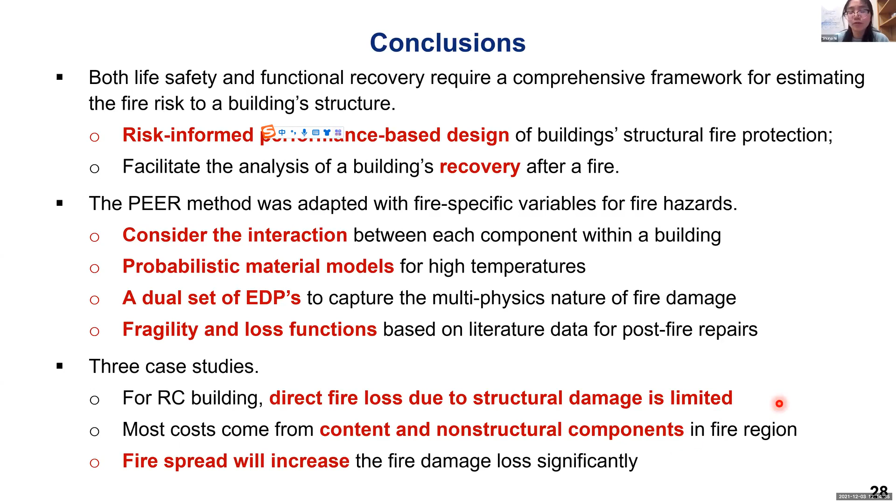Here's some future research. For one thing, we want to improve the damage and loss analysis of the non-structural component and content, since in the current framework this part is simplified significantly. So we try to refine that methodology to make the damage analysis and loss analysis of structural component and non-structural component content more correct, and we would like to include the calculation of indirect cost.

The next part is how to accelerate the prediction of structural response under fire. The current one is still a physical-based model, so our next step is to develop a data-driven model to analyze a whole structure system. There's some existing research which has developed different types of data-driven models, but they mainly focus on the structural component level, a beam or column. So we try to develop a data-driven model to analyze a whole structure system.

The last step is to adapt this framework for other types of buildings. The current framework is mainly for reinforced concrete structure. Definitely it can be changed for use with timber structure, steel structure. What we need to do is define material-specific engineering parameters and fragility functions and classification of damage states. And recently we got funding from the National Fire Protection Association to move this research further.

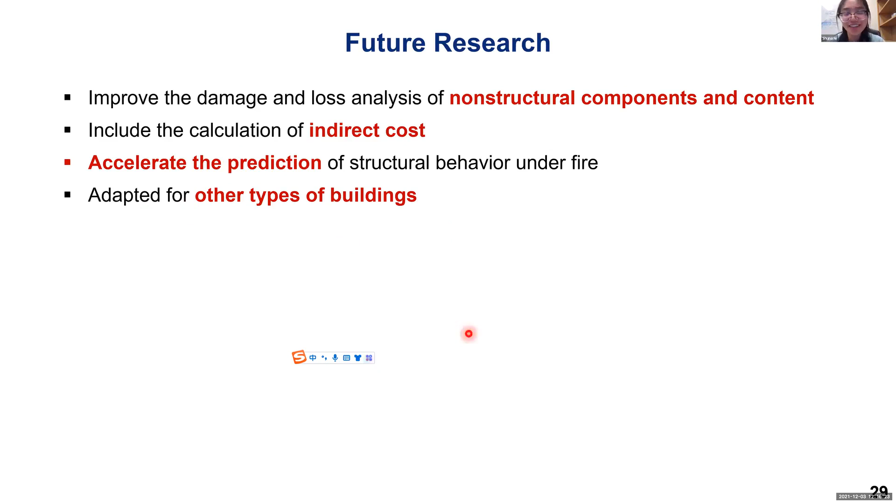Dr. Ni, thank you so much for your presentation. Thank you. My name is Anwar, I'm actually one of the postdocs here at PolyU. I also work in a very adjacent area to yours. I do structural simulation and fire.

And just let me start by saying this work is wonderful. It has touched upon many very important aspects. I don't think many people actually consider the variability in concrete material properties, for example, in fire. Another thing you touched upon is you integrated all 4 important criteria in your framework, which I think also is missing. There are some questions in the chat already.

We have a question from Professor Asif Uthmani. He asks: this is great research, but do you think it has a chance to ever be used, considering that the PEER method has not been used widely by earthquake engineers?

I think the framework is very difficult to be used so far, since the prediction of structural response is still physically based, meaning it's finite element method based. So when you try to incorporate uncertainties from different variables, you have to use Monte Carlo analysis, which is very time consuming even for analyzing just one building. So I don't think the current framework can be used practically.